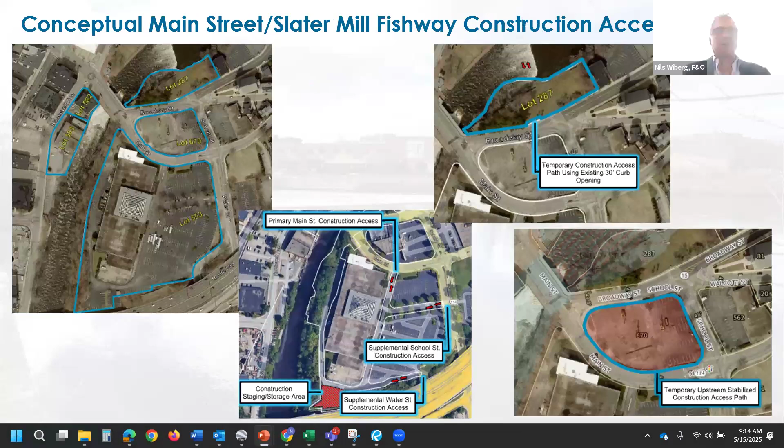Okay, let me get into presentation mode here. Bear with me, getting up to the first slide. Now I'm going to move this little panel out of the way — I guess I want to open up the floor to questions as I go through this. I'm going to minimize the screen so I won't be able to see anybody's face or if a hand goes up, so maybe Andy or Steph, if somebody would like to ask a question or make a comment, please just interrupt me. Will do. Okay, so, we have been working, as I noted, on the design for this, and I just want to make sure everybody can see the full screen. I have some panels here from Zoom that I can't move, and it's obscuring part of my screen, so bear with me. I can't even grab the panel and move it out of the way. Okay, thank you, okay, here we go. So, slide, okay.

We've been preparing the permit applications and the permitting level design. PAL has also completed a cultural and historic assessment report for the Apex parcel, which was part of the last phase of work. Of course, we have the same for the city parcel across the street, Main Street, across from Slater Mill and Slater Mill Dam.

I want to outline that. I'll overview the fish passage structure and the design elements associated with it, which segues into the fishway being the framework or skeleton for the landscape and public access improvements that have been conceptually developed. I'll outline what those elements are - nothing set in stone, so we want input from the public and community so we can derive co-benefits, together with the master plan the Pawtucket Redevelopment Agency is working on.

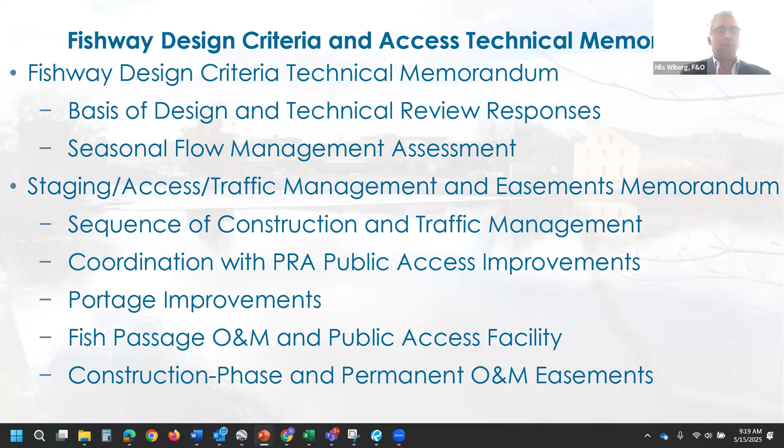We can't see the map, just a black screen. You might have to turn off your video for bandwidth purposes. There you go. Thank you, okay, so there's a lag, I get it. I'm going to turn off my video here and go to my panel. I even turned my phone on to 5G hoping that would help, let's see... Hopefully you can see my cursor as I guide it over - there we go, really slow. Okay, yep, we're good now, very slow, all right.

Okay, so here's a downstream entrance, and essentially we have an auxiliary water supply that's going to come in and feed water, because you just need a certain volume of water to attract the fish to this entrance.

We've had very conceptual discussions about potentially moving this entrance up underneath the bridge if the hydro facility were not to be in operation, but we feel that this flow management control will allow this fishway to operate.

This is achieved with eel pass being accomplished by an eelway structure trap within the fishway itself, along with eel climbing ropes and chains at the Main Street Dam, and also ropes and chains at the Slater Mill Dam. So we have multiple avenues for eels to migrate.

And then as the fish, herring, alewife, and shad migrate upstream through the fishway, we have an access here for RIDEM staff to come in and perform monitoring and tagging of the fish.

There's also a conceptual portage and viewing window shown here. The concept at this point was really just for access for Slater Mill to have permanent construction access should they need to repair any part of their mill or dam, as they did a few years ago.

Yeah, I think this is something that will certainly come to light as we explore this through 3D and cross sections to convey what the intent here is. But I think it's a very interesting, unique opportunity for people to get right on and next to a fishway, to actually look down into it and hear it. I think seeing how it's functioning is a really interesting opportunity. So how do we integrate that in a way that softens it up and really makes sense?

Nils, I was hoping you had these, but this kind of gives you a sense of what's underneath it. I think it helps with these visuals to get a better sense of it. And we'll be working through this to really tuck it into the landscape.

Nils, I don't remember if there's a bit of a curb up to the grading in your concept, or if it's perfectly flush with the ground surface. This is really a form-lined and stained concrete surface on the top and center picture, and we intended it to be level and flush so it's not a tripping hazard. That's what I thought, but the top of that wall might be 6 inches above the grass, just so we don't have debris washing into it from runoff and what have you.

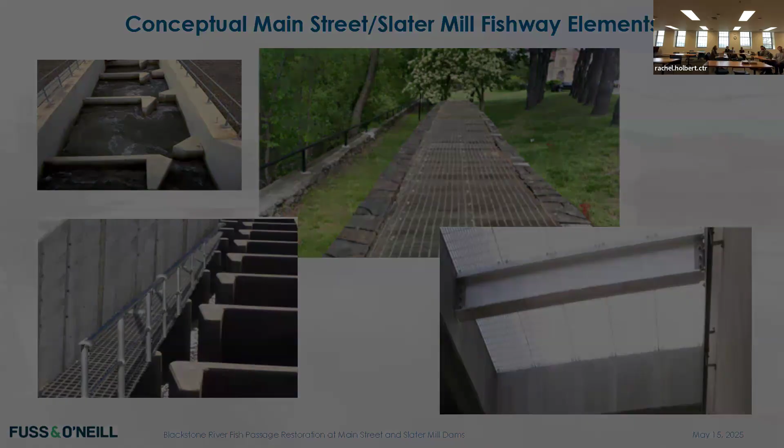Yep, Nils, can you go back? Again, that's all part of the concept design. Can you go back to the slide with the portage above Slater Mill? Okay, give me a shout when you see it.

How far is that portage from Slater Mill Dam? Well, I'm just looking at the stationing here, and it's about 700 to 800 feet, probably 775 feet. Google Earth shows that the portage from the dam itself is only about 150 feet, where kayaks would be coming in and out, away from the dam itself.

So you're saying the distance of the upstream takeout or put-in would need to be moved further upstream of the dam? Yeah, it would have to be out of the current project scope, into the parking lot where, in the conceptual map you have for Pawtucket, it looks like they're looking to do improvements to the old funeral home that's now vacant, and into that parking lot. Is that property also — well, that's Block A. I see that's Block A here. Okay, got it.

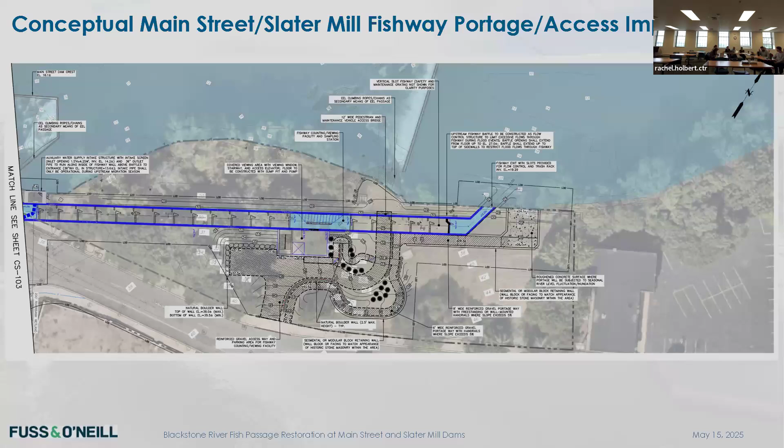Good input. And then I have some thoughts about the downstream portage. It's my recollection that there's kind of a retaining wall there on River Left. Yeah, right there. What is the plan down to the surface water cutting in, kind of thing? I want to make sure I understand your question — you're asking about surface water running down the slope where the contours are shown?

No. Right now you can't put a canoe or a kayak in where this proposed access is, because when you get to the river surface, there's a retaining wall, and then it's about a 10-foot drop to the river. That's right. Yeah, so let me go back to the historic picture, and I'll try to point to the top left-hand corner here.

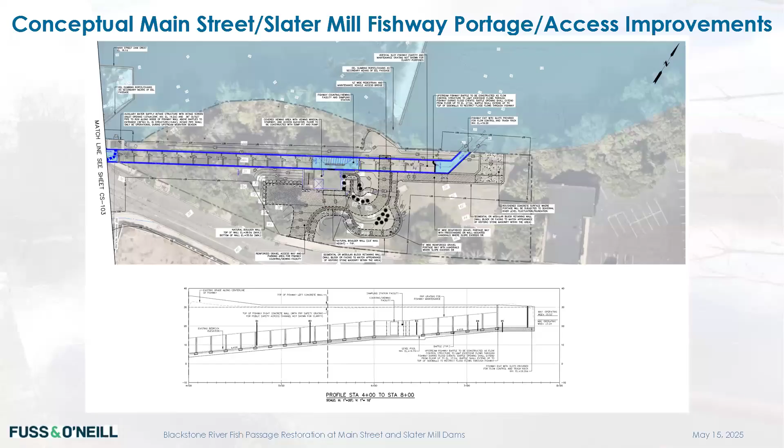Yeah, that's what I meant when you see the historic photo. So essentially this wall will have to be partially dismantled—that's the only way you're gonna get down to the river, without building into the river, which we don't want to do. Then all of the very small buffer on that side will just be completely removed.

Essentially that whole slope area is going to have construction access into it. Part of the restoration plan is to look at what kind of plants and shrubs and other opportunities there are to revitalize this area ecologically once the improvements are done.

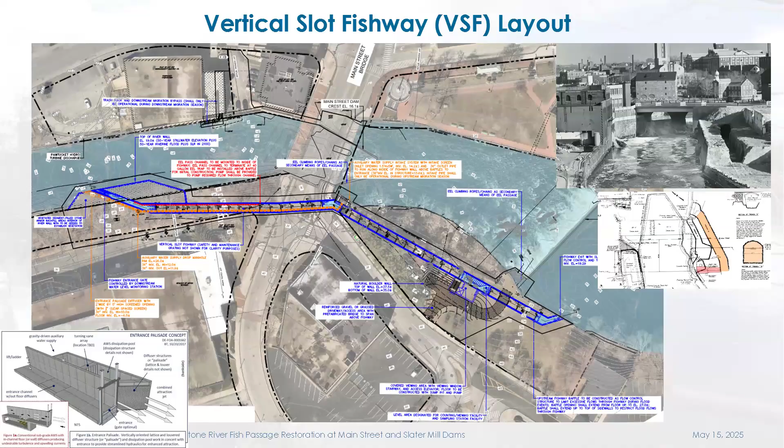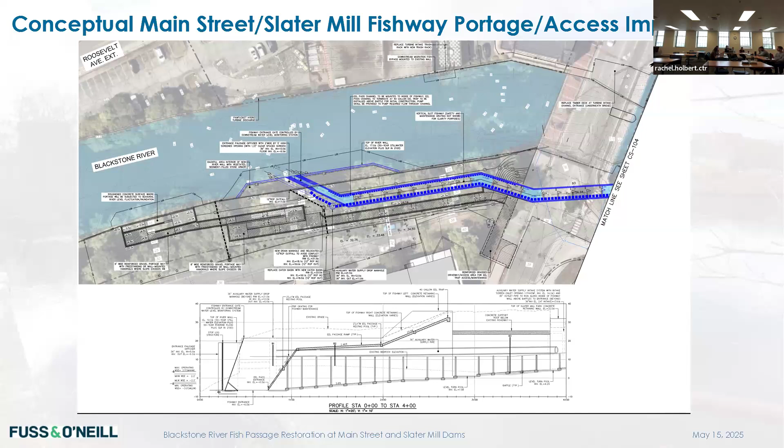So is there a concern—I know you mentioned that's in the floodplain where we're dismantling this wall—you've got a retaining wall running along the river with an entrance coming out of that. Is there a concern that during high water it'll just flood behind that retaining wall?

Yeah, essentially the construction and the materials will be resilient to those inundation events. That's the whole concept here. I think of this as floodplain restoration. Obviously it's not providing any meaningful storage, but we're reconnecting this overbank area to the floodwaters. There will certainly be some level of O&M if debris gets in there that has to be removed, but that's all part of the basis of design we want to explore, to see what the interests and concerns are so we can best balance them.

But there won't be a concern of flooding in a safety way. The water is coming over the wall and being released into the grass area. It's not going to get channelized into the portage.

That was my question. No, well, so you can see this dot hatch on the downstream portion of this wall—the portage—and you can see that the dot hatch stops about where the last, second-to-last turnback is. That's about the elevation of the mean high water, seeing that people are going to be launching from different points along this path, and during high water conditions, that last turnback is going to be inundated.

So again, the design of the walls to allow somebody to put in at the end of the dot hatch portion during those high water conditions is something we want to think about, and address in the best way that we can.

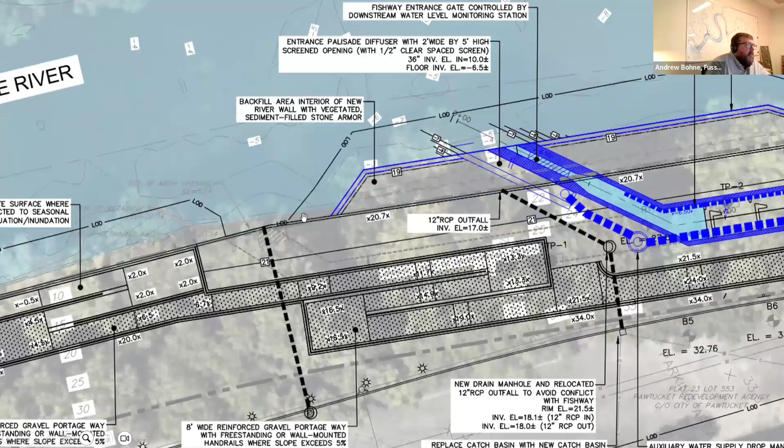Okay, I'll try to zoom in, tell me when you see it. Okay, so there's the top of the arch opening if you're looking across the river, and you'll see this stormwater outlet. This line is below the ground—it's a buried pipe, it has nothing to do with the surface.

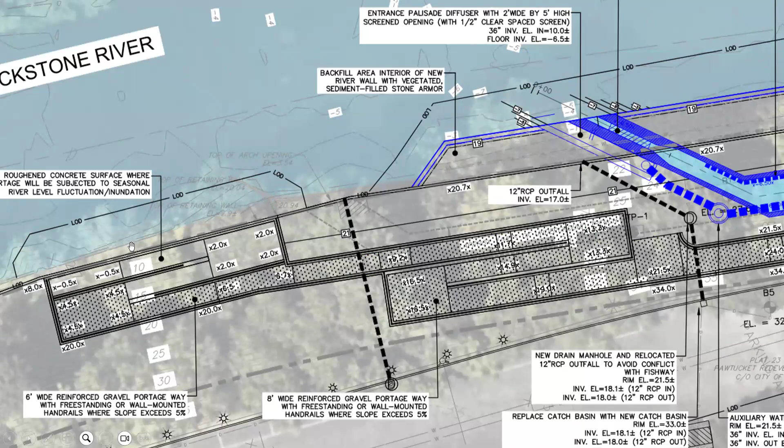But you can see this callout here, which is the top of the retaining wall at elevation 20, right here, okay? And then there's the bottom of the retaining wall at elevation 7.9. So this is a 12-foot transition—that's again the transition we saw in the historic photo. So when you get down here, this portion is about elevation 8, and that's why we need all of these transitions with the turnbacks.

Does this part of the project need to be ADA accessible? That's part of my question too, ADA accessibility for signage and education, yes. And on the other side, where it's more parkway, where you're able to, yeah, that makes sense.

I'm having a hard time, I'm a bad visualizer, that's just why I always need renderings. But I don't know if this is necessarily the best way. Do we need to do ADA? Is it required for kayak portage?

Typically, yes, and it will. Go ahead, Bill. Our experience is that on the project, Andy, I'm going to be quiet. You can finish. No, you go.

Well, we're doing a federal project with ADA access improvements in Herring River and Wellfleet, and all the federal funding that's coming in, that is absolutely required. But again, there's always the opportunity for waivers. But we want to start as the most inclusive and accessible design from the concept level and have the community tell us that it's not what they want.

Yeah, but there may be other parameters around that. Andy, go ahead. No, that was exactly what I was going to say, that makes sense. We're not trying to limit access, I want people to be able to get to the river safely.

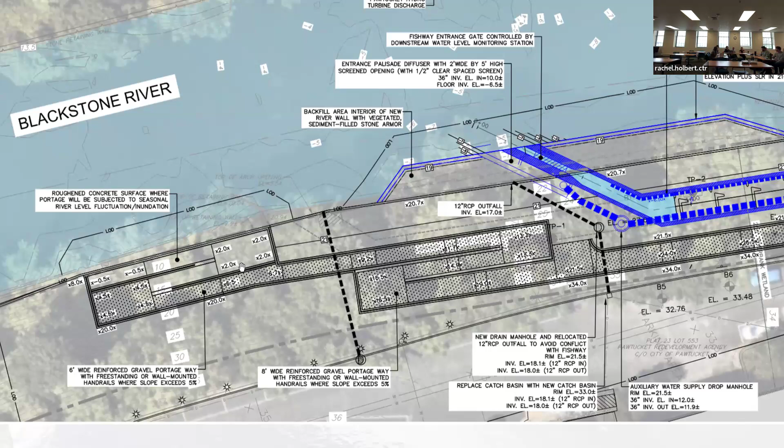I just wanted to say it out loud in case, because it looks like a lot of disturbance on this side of the river and a lot of length to get down to the river. And I am not a good visualizer, I'm trying to visualize getting down there, it seems difficult.

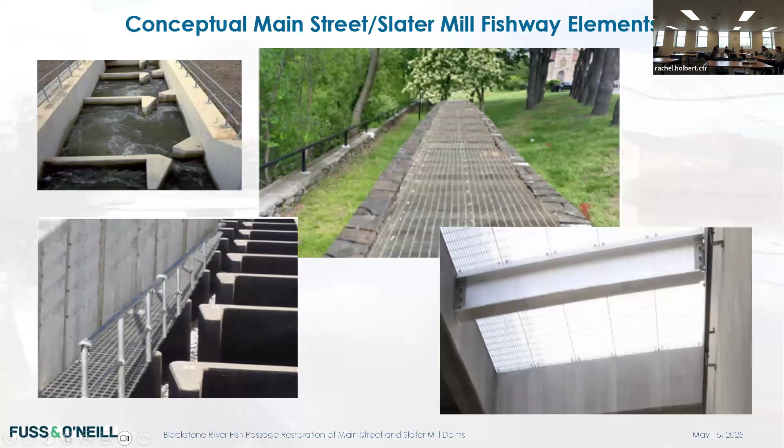Yeah, I think the thought you mentioned before of, can we incorporate stairs as well as these turnbacks so that there's a shorter but less accessible route? And I can't visualize the part there. Yeah, I would just say that no matter what, you're not down to elevation 8 until you get to this point in the structure.

So even if you eliminate these switchbacks, which is great, and I'm sure that Andy and Ian can find a way to do that, you're still going to have to get down to this point before you can, because we're not going to be dismantling a 20-foot wall to make this 50 feet or whatever shorter.

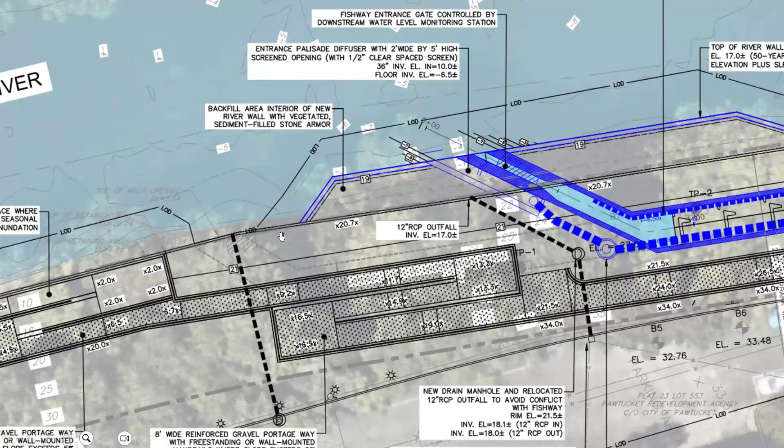Okay, and we'll certainly do our best to get creative, but the reality is we've got to connect those points, and there's only that very finite amount of space to do it. So I think it's going to be some version of this, and I think we can get creative with including the stairs to make a more direct path.

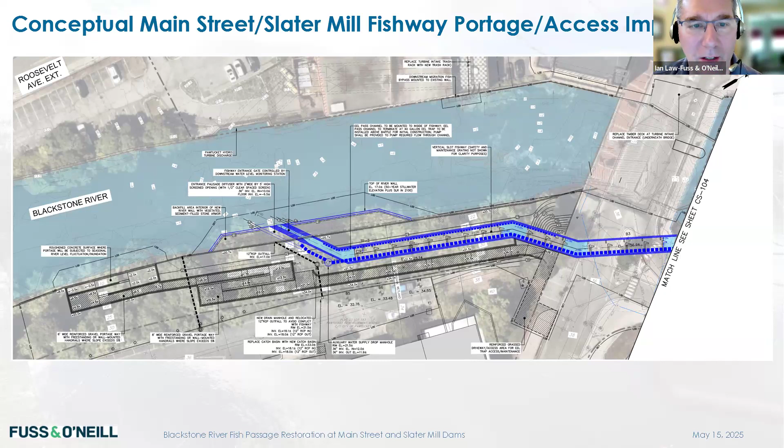And we can do our best to soften it, as Andy alluded to. And I think we could actually get creative with, as you were describing, maybe having an area where you can set your vessel on something, whether using the ramp or the stairs. So I think we can make it as functional and direct as possible, but we are limited with the connection distance and grade, as well as the horizontal distance that we have to play in.

Can you send us the high resolution images of these so that we can really zoom in and poke around afterwards too? Yeah, I just want to caution that even though we show things in a level of detail, we did that so that we could achieve ADA accessibility. So even though it's designed at this level, with all the numbers on there, it kind of got a little bit of the cart in front of the horse with some of the concept level and high level thinking that Andy and Ian are going to bring to this project.

Yeah, I think that's okay. At least for me, when I'm looking at designs, I print them out in the big format and I sit there at my desk with a highlighter and really take the time and dive in, and it takes me a long time to understand it. So I'm just having a harder time giving appropriate feedback. So even knowing that it's not perfect, if I can see it, it'll help me think about what the questions are.

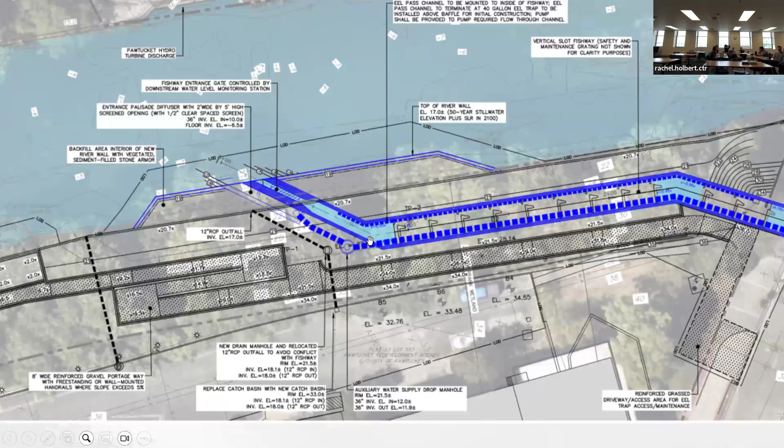Sure, yep, thanks. Just as a point of order, you can see that this wall, the top of this wall is at elevation 34, which is very close to what the pavement is up here behind Apex. And the bottom of that wall is 21. So that's a 13-foot high wall, just to give you an idea of the scale and the elevations that we're talking about here.

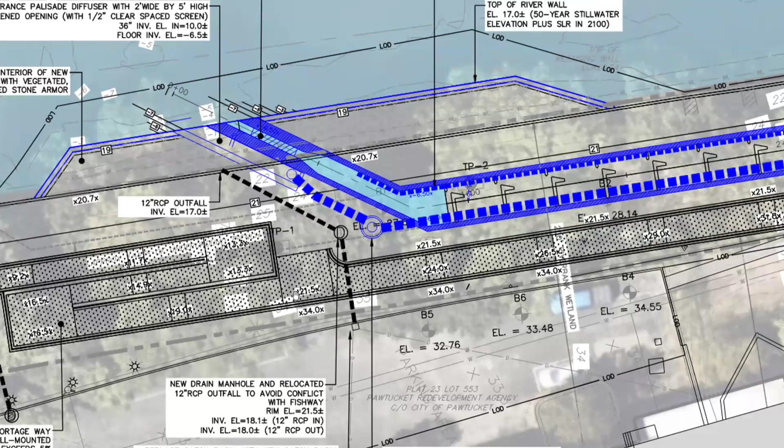And again, Andy and Ian will develop the renderings that will help facilitate yours and the public's understanding of these concepts as they develop.

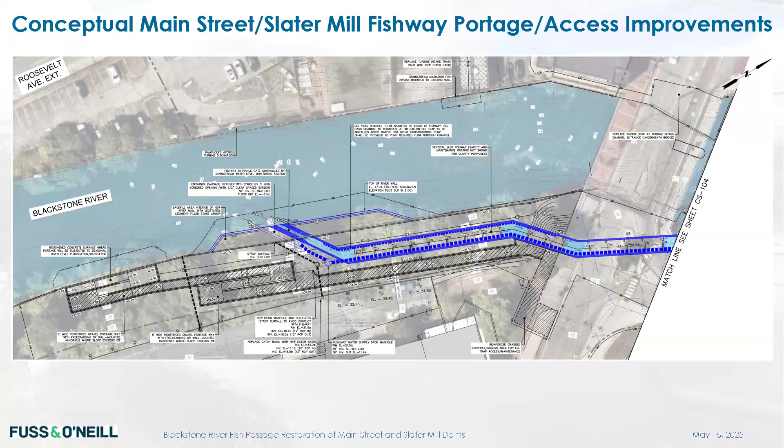All right, Andy, I am going to show a picture with a fishway conceptual viewing window. Let me know if you can see it. And again, this is just a concept, a much bigger facility. I think it's over on the Connecticut River.

We just want to allow school kids to come in here safely to view it, and the community to see it in person. There's nothing like seeing a fish in person through a window, or numbers of fish moving upstream.

Down here at the bottom center, this is an architecturally congruent outbuilding structure that is adjacent to the historic Slater Mill. We would envision something similar to this as being the place where people, or the public, can walk in to access an industrial lift elevator. It's going to have chains around it, but it's essentially an industrial lift that could bring equipment or fish in, tubs of water down to the mezzanine level where RIDEM staff will need to have access to it, or it could bring people with disabilities down to the viewing window level.

That would also provide access to the staircase for folks who don't need the power lift. Again, just some visual elements here as an example of what a portage could look like in an ADA accessible format in a very natural environment. We're trying to use natural materials and natural curves and natural substrates that provide a slip resistant surface so that it doesn't become a hazard for people when it is periodically inundated.

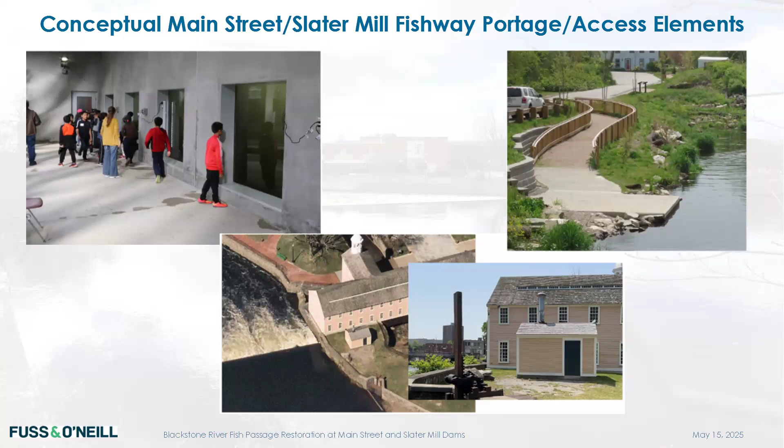I'm going to try to move through these next slides, and Andy, the next one I'm going to show, give me a shout when you see it, is the overall picture of the various spaces.

So we have the improvements, overall phasing and access. This was developed prior to the development of the access improvements, so they're not shown here, but the whole concept is a parcel that we hope to have conversations with the city and the PRA relative to temporary access for construction. So we essentially show where those access corridors would be. The areas that are crosshatched are proposed staging and stockpiling areas for construction operations during the period of construction.

We would be looking on a calendar basis, with the permits being submitted and obviously the funding being in place and procurement, doing this within a 9-month period. During the low water, the other part about this is that we can construct a lot of this infrastructure during the winter season or the high spring season. We're not really constrained by the July 1st to October 31st parameters necessarily, or those could be included in our planning for construction. Andy, these are some of the pictures just showing these respective locations.

For construction access, I won't spend time on these except to say that we've done a fair amount of thinking about how this project can, the better construction access you have will drive the efficiencies of construction, reduce the duration of construction, and that's going to affect the cost of the bidding. Essentially our goal is to make this a very efficient project to build, from a safety standpoint and impacted traffic. Andy, these two pictures, give me a shout when you see them.

So phase one, what we call phase 1A and 1B. Essentially the first parts of the project are going to be built below Main Street. It's going to be an open excavation to start, where we are building on the eastbound side, the south side of the bridge, to build the fishway. That'll be the target point that we meet when we build the later part downstream.

This will entail a detour of traffic at Exchange Street and the crossing there, and then back down around Broadway. But this is just concept—we have not had conversations with the city or DOT or anybody else about what this detour would entail. This is a detour that was utilized during the last repair and closure of the bridge. So again, this is not new.

Once we get down to... the staging areas that you showed are also part of the RFP for the Pawtucket Redevelopment Agency. Have you gotten an idea of the timeline that they have? Because although it may sit as a vacant lot right now, by the time we get this money and shovels in the ground, that might be actively becoming buildings. Yep, that's part of the conversation that we seek to have with the city and PRA, so that we can understand timelines and how these projects can be best coordinated to avoid conflicts.

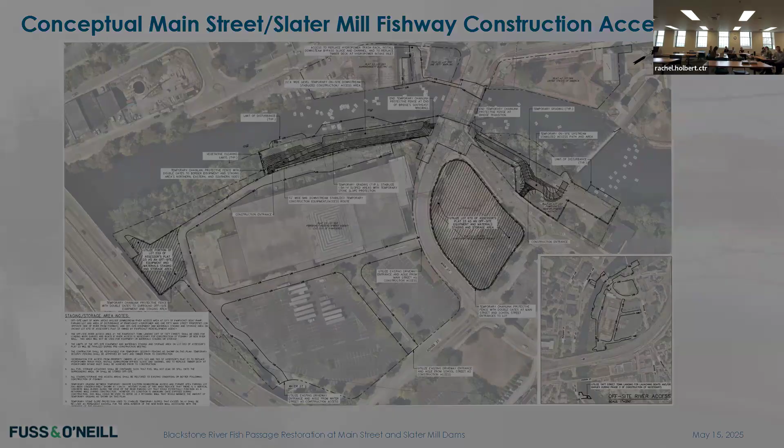So again, I'll go back in here. We just have traffic management for phase 1B for the other side of the crossing. Then the next portion of the structures will be the upstream, and then downstream—this will not entail a closure of the road. But we're planning to utilize Broadway, the closure of that, to have construction access here on this island where the building is demolished and it's currently vacant.

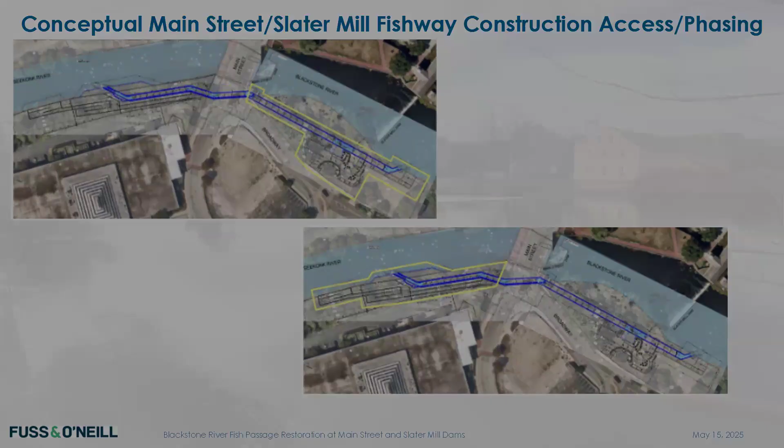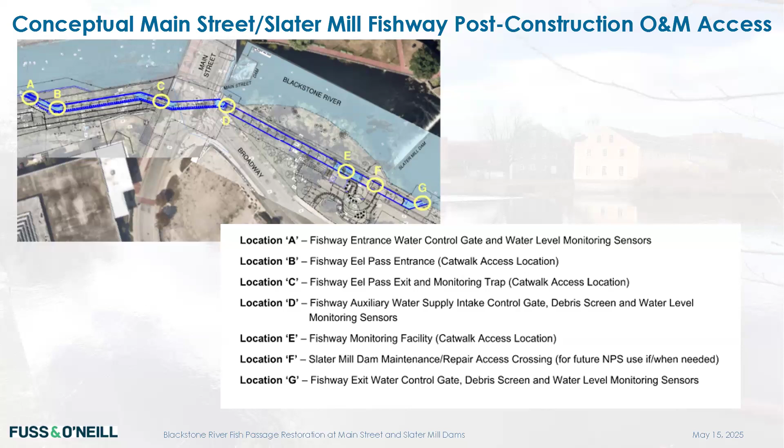I think, Andy, this may be my last slide. Let's talk about the next steps in our scope, which we're currently becoming contracted with through TNC and RIDEM. That starts with a key stakeholder walkover and a workshop so we can talk about these elements, hear from the city, the PRA, the National Park Service, and other key stakeholders about their views, concerns, and goals. Then we can take that information and Andy and Ian will work with their team to develop a concept master plan—a revised master plan—showing planimetrically where all these elements are based upon that input.

Then there will be another outreach event to again solicit feedback from this group and others in the public. And somewhere along that chain, there will be a 3D model developed and graphics that will be developed.

Essentially what we're scoped on right now is to develop five graphics that show, from a kind of oblique, bird's eye viewpoint, what these concepts look like on a realized level. But Andy, do you have anything else you would want to add or describe to what the intent is?

Yeah, I think you did a good job, but a picture is worth 1,000 words. So the intent would be to really convey the look and feel of what this could look like. But we want to get some buy-in on the concept before we go into the 3D modeling exercise, just because we'll use it as a tool to help refine things. Ultimately, we want to have a good, meaningful conversation with everyone, and we'll utilize every graphic skill and component we can to really convey the intent of the proposed improvements.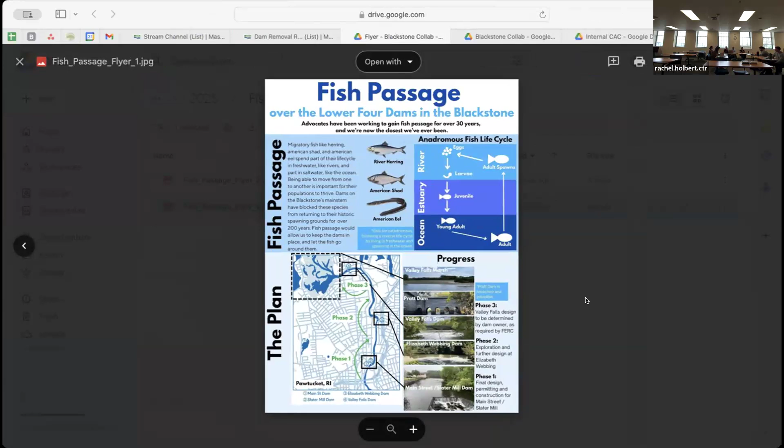The only thing I'd add is that Jason did talk about setting up a meeting with the city, PRA, whatever. But prior to that, I think it would be very helpful for DEM to have a briefing document that would allow them to discuss with PRA what our intentions are. It doesn't have to be an elaborate 100-page document with designs and stuff, but just outline some of the concerns and where we want to go with this—a layout of what we really want to do, where we want to do it, including the necessary easements, such as the construction easement and the laydown easement. So if you could find time to put that together for Jason and his staff, I think that would be very helpful. Jason, you want to add anything to that?

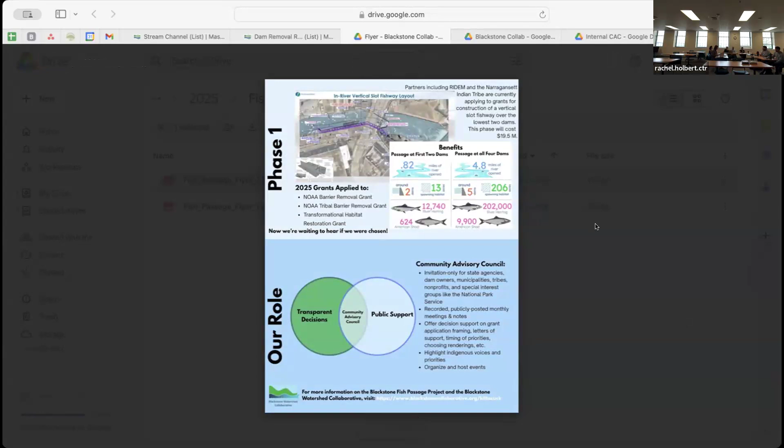No, I think that's it, John. I alluded to it in my email to Pawtucket, that once we get the meeting set up, we'd get them something brief to look at. So yeah, I think it would be helpful to give them something they can look at prior to the meeting, and then go from there. So that's it.

Great, well, certainly, I have a lot of materials here. I'm going to try to consolidate and make it as informative and concise as I can to those points, so we'll put that together as soon as we can.

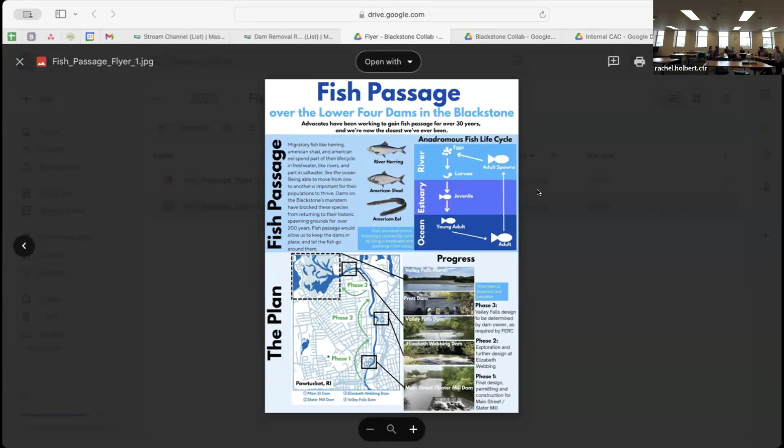We also wanted to put something specifically about Fish Passage. Kaylee made this little thing, a 2-pager, and on the first page...

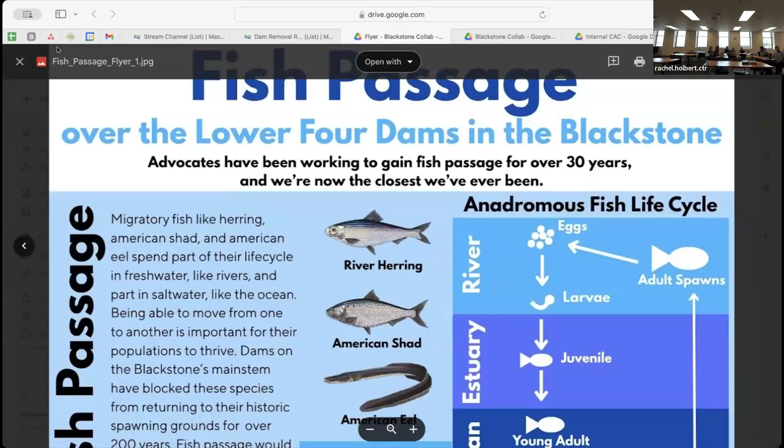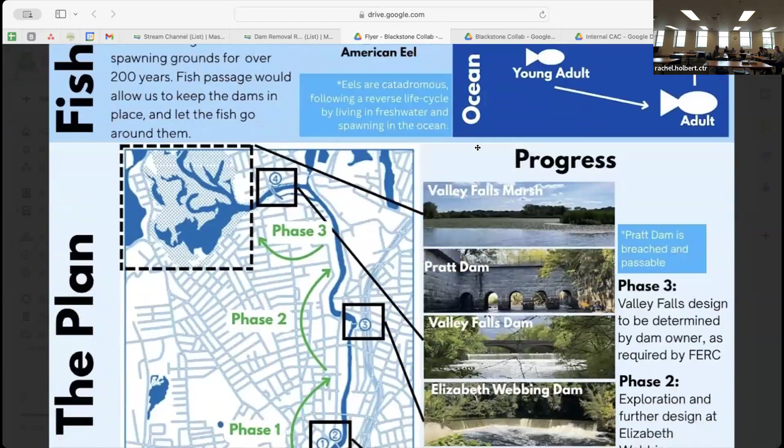I love the balance of graphics and text. At a glance you're like, oh yeah, fish, they live in the ocean, but it's truly good. It shows the anadromous fish cycle, like eels are catadromous—I know this is different but we're not going to make a different graphic. We have this little map, which I'm sorry we messed up. The Pratt and Marsh will be switched when we print more.

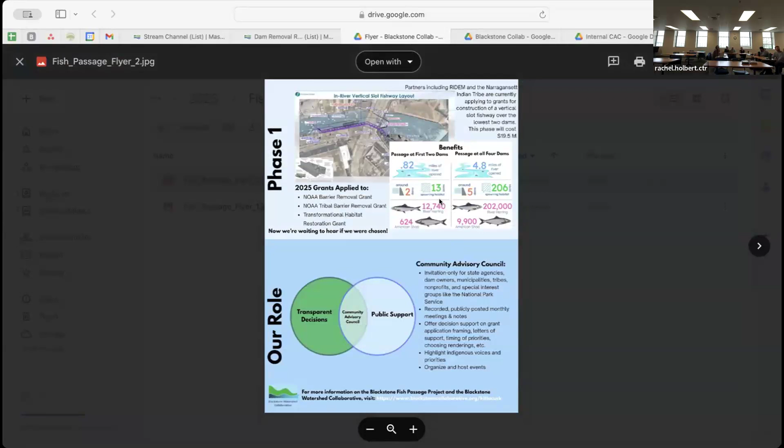That's the first page, and on the back it has what we made for the NEAFWA conference, showing the benefits of first 2 dams versus 4 dams, and a bit on the CAC, what the collaborative does—basically what we do—plus the link at the bottom. So all of our attendees will get a 1-pager of that, and hopefully come away with some understanding of why we're actually there instead of just getting our faces painted like fish.

I wish I had that graphic of this. Yeah, me too, I'm going to email you that. NEAFWA was so much time and money—it was like a $300 conference to be there for 6 hours, and it was like a 4-hour drive in each direction. I didn't love it for a lot of reasons, but it did force me to make that, so in the end I'll take it.

Also, just a note—I've been saying Lonsdale Marsh for years, and I've recently been told I shouldn't say Lonsdale Marsh, I should be saying Valley Falls Marsh. So some people, I guess... I think some people consider the entire thing Lonsdale, and some people consider only the upper portion Lonsdale. So I've tried to start saying Valley Falls Marsh so it's more clear to locals, I guess.